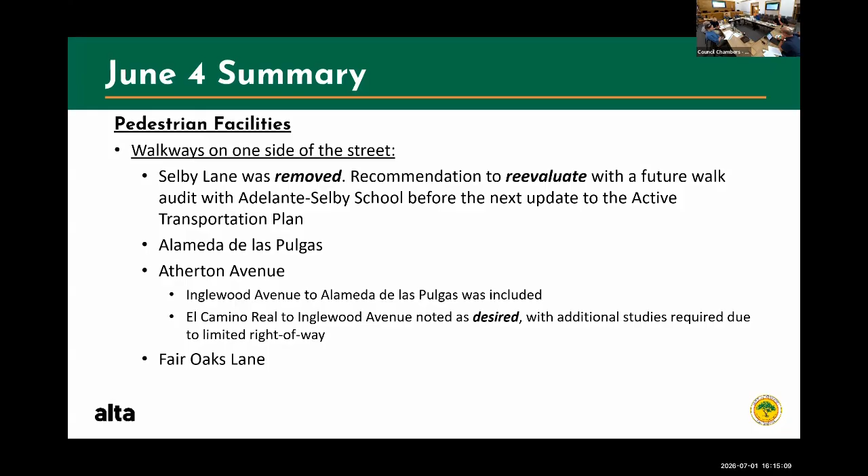Walkways are also to be implemented on Middlefield, which you are funding - today is the first day of the fiscal year, the current fiscal year budget. We have studies ongoing for Station Lane and Watkins Avenue. What was added was a walkway on one side on Oak Grove between Edge Road and Middlefield as a recommendation. The others are around the schools on the west side of town, around Alejandra, Park, Emilie and Elena. Selby Lane's recommendation was removed at the last meeting.

On the school side, we should also make the recommendation. Park Lane, Emilie, and Elena are only adjacent to Sacred Heart, and there are portions of those streets without sidewalks that go beyond Sacred Heart. On the map, it was really that loop around Sacred Heart on Emilie, Elena, and Park. I think we should state that it's around Sacred Heart so readers don't get confused.

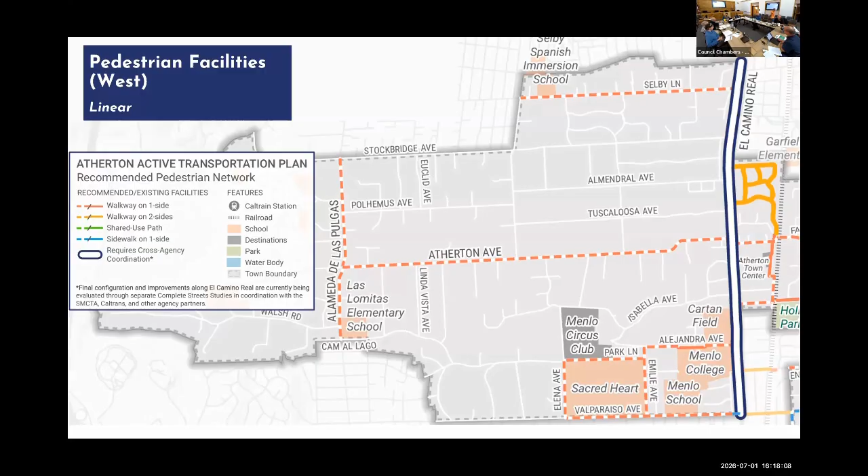On Encinal, I brought this up last week. The street is split between Menlo Park and the other side. We have bike lanes on our side, and there are bike lanes on both sides. My recollection is that the right of way all the way up to Laurel is ours, and the fronting properties for Felton Gables are Menlo Park properties—no wait, the roadway I believe is ours.

From Laurel up to Middlefield on the south side is Atherton's. But from El Camino all the way up to Laurel is Menlo Park, and El Camino all the way up to the school is Menlo Park on the north side, on the Felton Gable side.

Are you saying the roadway is ours even though the residents are not in our jurisdiction? Why is that? It's just the way the lines are drawn. There are several areas like that—portions of Stockbridge where the residents are in unincorporated county, but the roadway is ours.

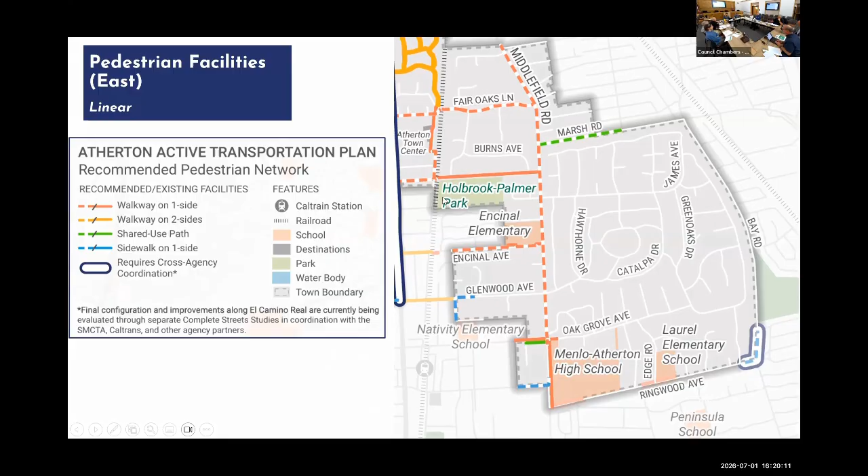I get all the mail from Encinal too, on Encinal. Well, that's the post office—yeah, it happens.

Again, with pedestrian facilities, we have that shared use pathway on Marsh. Sidewalks—this is different than the walkway—on one side fronting the multifamily zoning areas, and per the comments last time, it would be contingent on the development of those multifamily properties.

And then on El Camino, we have the recommendations for the multifamily zoning areas—what am I forgetting? There's that one lot, kind of at 23 Oakwood, that's on the border with Redwood City.

Do they have sidewalks? Redwood City does, but not us. I'm just thinking, are we going to put a sidewalk on one lot? Does it connect to anything? I don't know if we want to make an exception, but it's next to Redwood City, and they do have sidewalks, so it would connect—it wouldn't just be a random floating sidewalk.

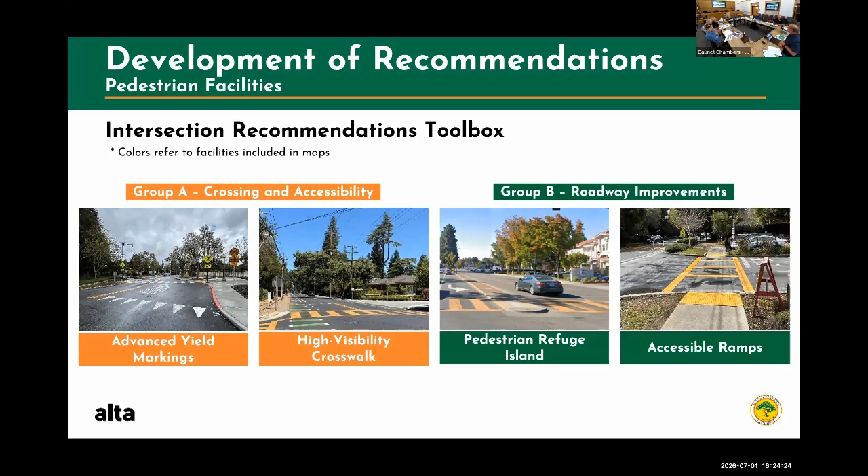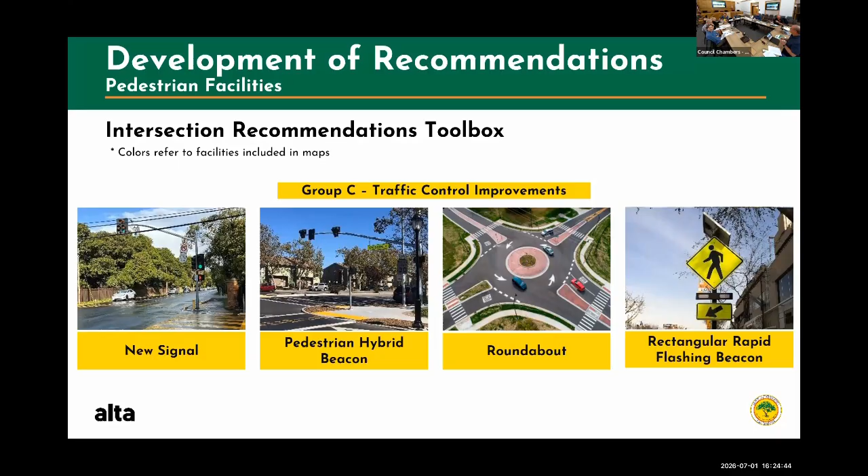Others, which are a bit more expensive, impactful, are new traffic signals, hybrid beacons, roundabout, rapid flashing beacons, which you all are familiar with. And so those are just tools in the toolbox for doing improvements.

And so as we go through the different intersections, I do want to highlight that though we are, for example, listing the desire for improvements along El Camino Real, the actual what those are going to be is really going to be determined by those studies that are being done. And there is a desire for pedestrian facilities, bike facilities on the roadway. And so similarly, having crossing improvements that correspond and correlate with that to make those crossings safer is something that needs to be incorporated in the study and the future improvements.

Similarly, on Middlefield Road, you've appropriated funds for pedestrian improvements. So as we go down that, we're going to be looking at each of those intersections to make sure that the crossing improvements are appropriate.

Several of the recommendations are either already in place, or being highlighted otherwise. So, for example, we already have high visibility crosswalks on Middlefield Road, which we implemented - it's there, should have it. We already have them. We have ramps already on Middlefield. There's just not a continuous walkway, which again is being funded.

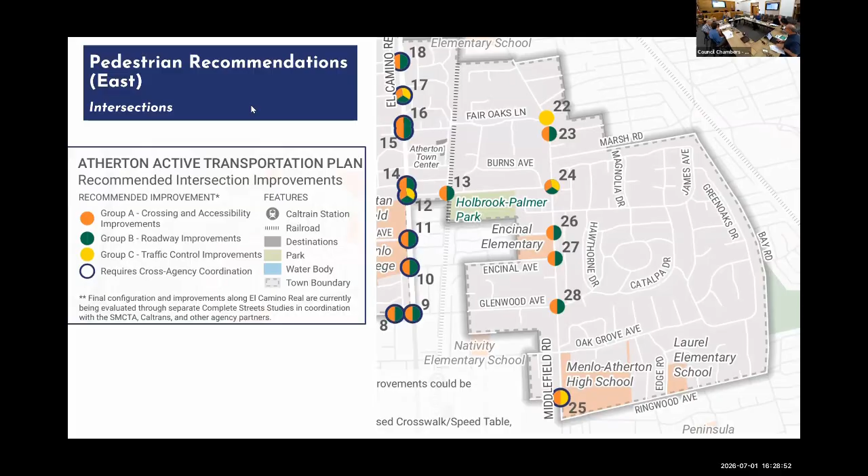Okay, give me a second and I can pull up. Just pull with it so we're all not missing any. If El Camino's redone, all that has to be sorted out to make sure it gets done again. So if they redo El Camino, then having a list.

I don't know if there's a pedestrian refuge island on that intersection on El Camino. Yeah, there is, and there's a place where you can stand at Encinal. It's not an island though, it's more of just a spot in the center median.

And these need to be protected in the crosswalk. There's a curb on the front so that the car hits you in the middle rather than on your legs, and does more damage to the car. That's only fair.

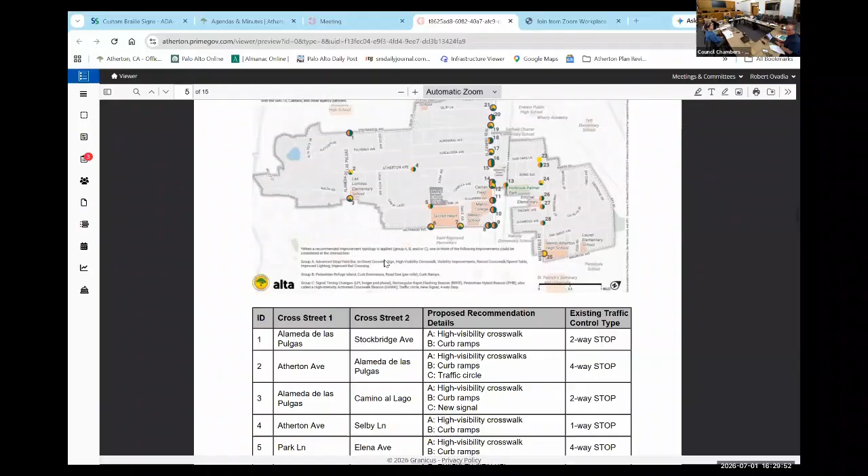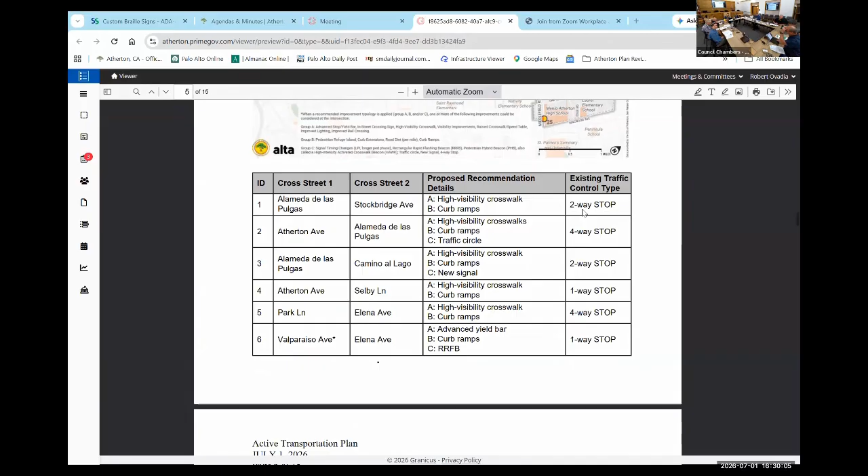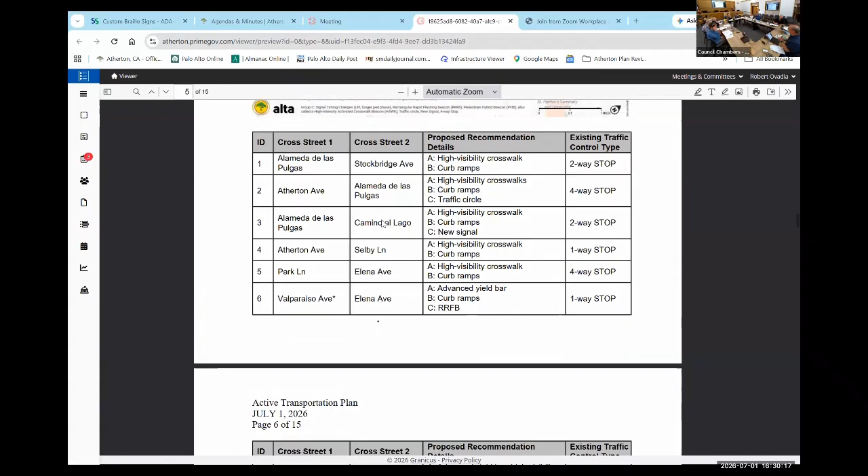Those have all been funded, those are all happening. Just making sure I didn't hallucinate. Atherton at Selby, this is currently a one-way stop.

This is currently a one-way stop on the Selby side. As we develop the plan for the walkway on Atherton, that would include at least a crossing on the Selby side. Having an uncontrolled crosswalk across Atherton is a little bit of a concern, so we wouldn't stripe a crosswalk without some sort of traffic control on Atherton, which is not contemplated at this time.

At Selby and Atherton, you only stop on Selby right now. So you're saying we wouldn't put in a crosswalk without putting in some sort of control device, a stop sign? No, rapid flashing beacon or something else. Keep in mind, there's no place right now to go from one side to the other, so we're not going to do any.

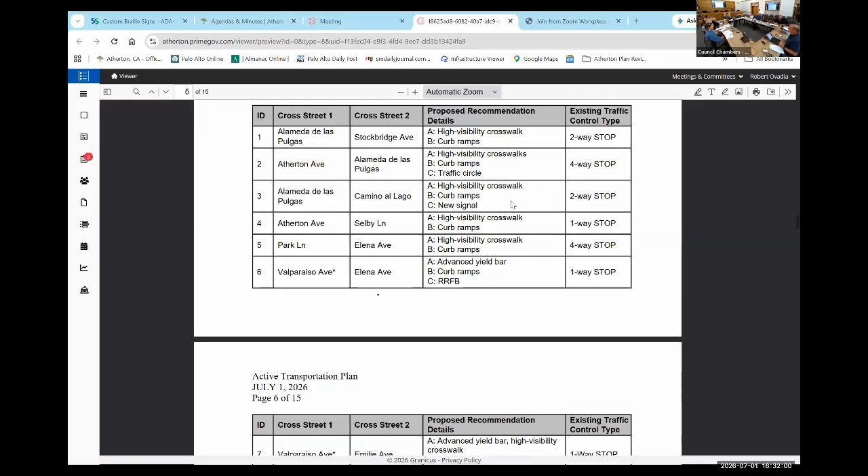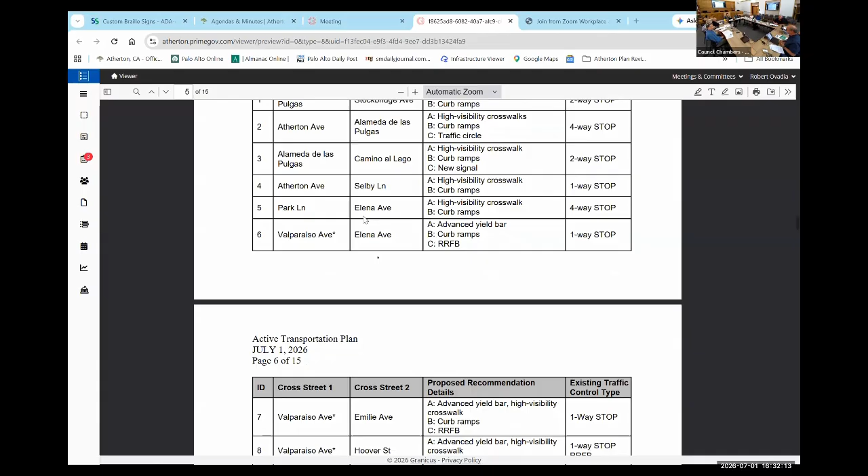As we do that walkway, there'd at least be the crossing across Selby. Park Lane and Elena, I think is just two lines, and so that'll be changed to a high visibility crosswalk, because it's right there around the schools.

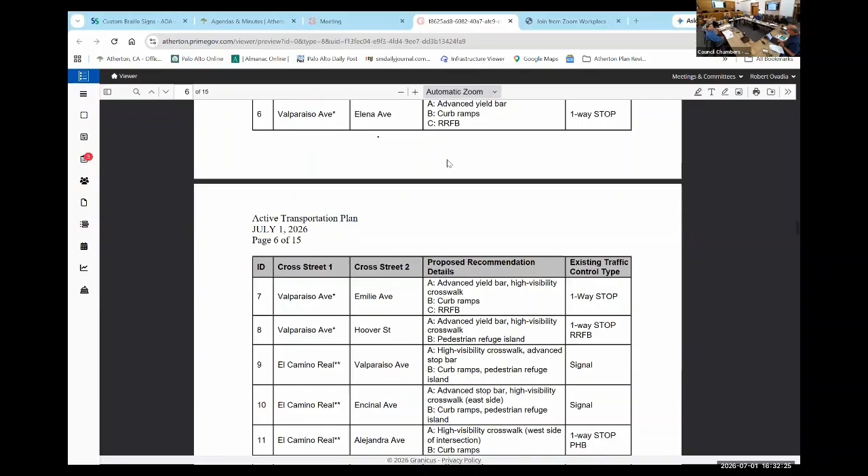Valparaiso and Elena is currently a one-way stop control. And I'm going to highlight these ones at and around the schools. There are certainly ways to improve those with rapid flashing beacons. They are shared intersections, and they are also related to private schools, so if desired, the schools can help with partner funding.

We would coordinate with Menlo Park for those as well. They've already put in some of these. Sacred Heart already has some in. Elena has a crosswalk, but it doesn't have any rapid flashing beacon.

No, it doesn't, not on Elena. There's one further down. Right as you go in, where the cars drive in, there's a rapid flashing beacon, and it's on the east side of the entrance to the school, where they also have a crossing guard.

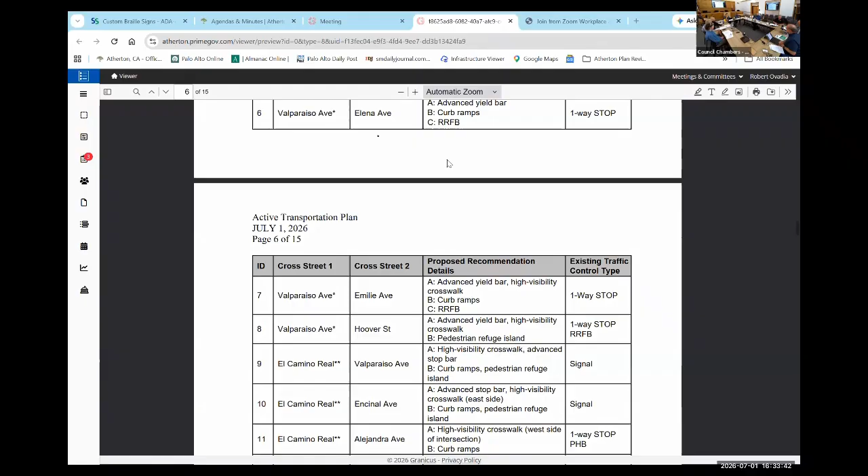And there is a pedestrian crosswalk painted there too. That's on Valparaiso, not at Elena. It's in the middle of Valparaiso at the entrance. Right, at the entrance, that's what I said, where the cars go. I know that's what you said.

And then again, we talked about El Camino Real. We talked about Watkins at Station Lane, that's funded currently and being reviewed.

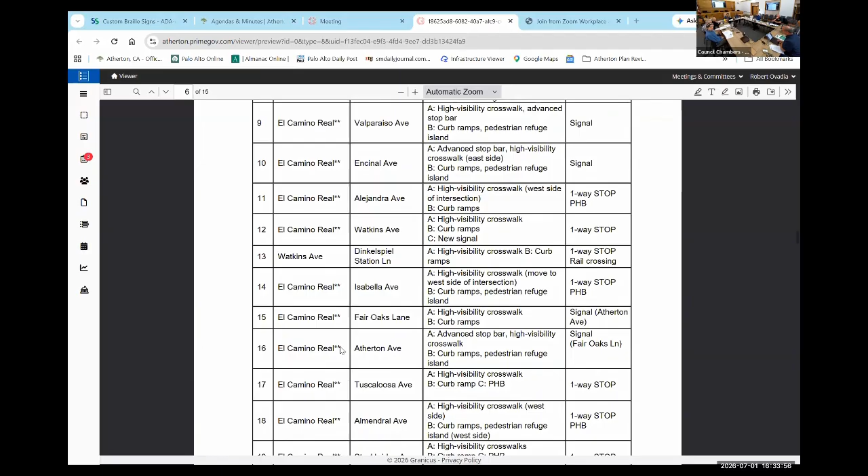And then Fair Oaks at Middlefield, we talked about. Middlefield at Holbrook, again, this is going to be linear along Middlefield as we do the improvements for the walkway.

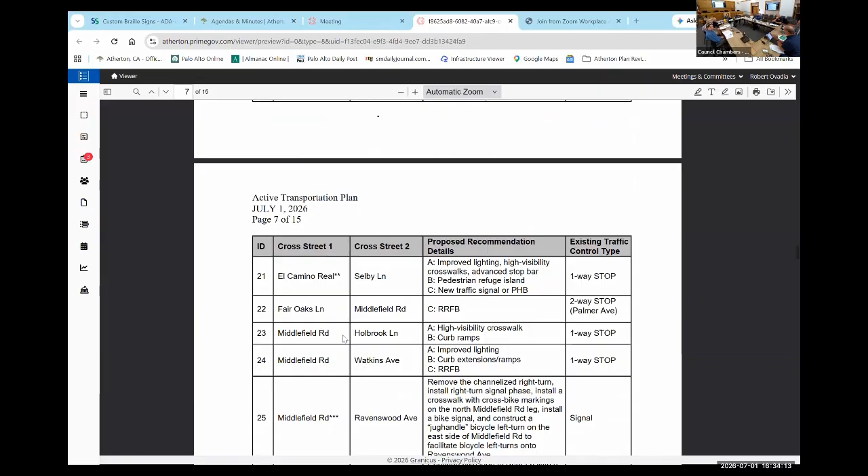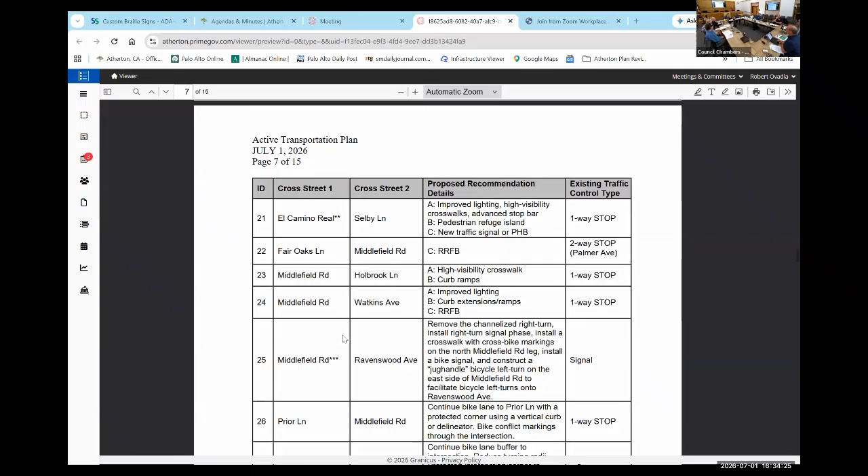I don't know why we're going through this if we're gonna come back and talk about every single one of these intersections. Were there ones that we skipped that you didn't talk about already? Is there something specific you wanted to talk about? Let's go through this.

You said that the proposal for Selby and Atherton Avenue isn't sufficient, that it requires some other device. The proposal is for a high visibility crosswalk, right? Yes. And you said that's not sufficient, it requires...

For crossing, we have a stop sign on Selby. So with the linear improvement of the walkway on Atherton Avenue, you'd have that high visibility crossing and ramps going across Selby, because there's a stop sign there. There's no control on Atherton Avenue, so there'd be no crosswalk across Atherton Avenue, unless you decide you want to do something else there as well, consistent with that.

It's certainly doable with a rapid flashing beacon, but the comment is you don't just stripe the crosswalk across Atherton Avenue, because the cars aren't stopping.

I may be old and confused at this point, but I always thought that there was, from Caltrans, the warrants to do a stop light at Selby and Atherton Avenue. At Selby and El Camino? Yeah, I thought... Oh, El Camino, that's different. Oh, we're okay, talking about Atherton Avenue. The question is about Selby at Atherton, which is a T intersection.

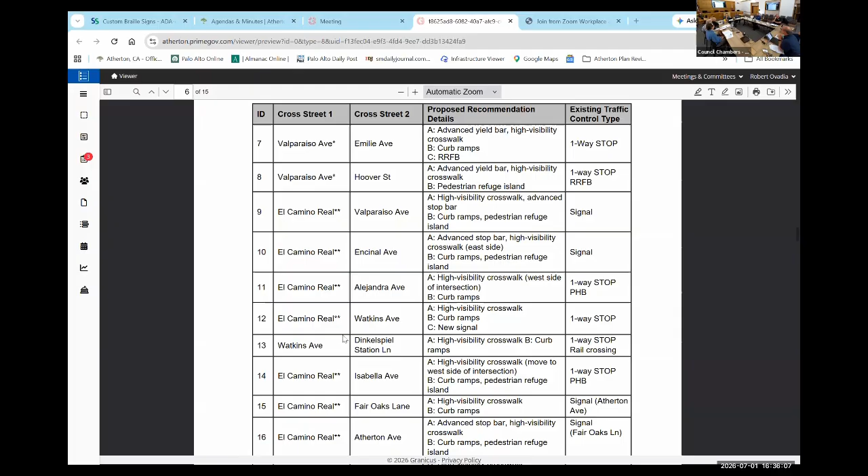Okay, good, because that's what I think needs to be done right away. Well, I think we should at least have a discussion about whether there should be a crosswalk across Atherton Avenue. Personally, I think that...

It's not decided where the walkway would be, but if the walkway were on the east side, on the side that is, I guess, the south side - people get confused about what direction is what - but on the Menlo Park facing side, if the walkway's on that side, we probably don't need anything coming across Atherton Avenue. If the walkway is on the other side, we obviously need the crosswalk across Selby, and maybe we don't need a crosswalk across Atherton Avenue, but I think we should discuss it.

There has been a fair amount of advocacy from people living along Atherton Avenue for a stop sign at that intersection. And I know that the cars that back up on Selby Lane to turn left onto Atherton Avenue can be quite long.

They can be, I've seen it, because people are afraid to go into the traffic - nobody slows down for you right there, they basically just blaze by you. There can be 7 or 8 cars waiting. I don't have a strong opinion about it, I'm just saying let's at least address it because it is an issue that's come up.

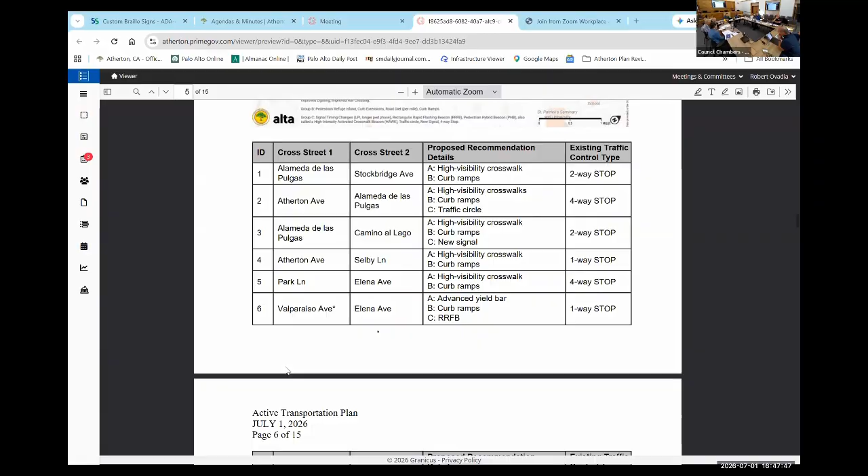Sorry, location again? On Elena between Park and... along the Circus Club and Atherton Avenue. It's really the cut-through from Valparaiso to Atherton Avenue.

And I think we did do a study once, and we didn't find anybody - it's all about timing, got to be there at the right time. So we already have a stop sign, so we just want to upgrade those crosswalks.

I think we're all good with that. So the next one is Valparaiso and Elena, which has a one-way stop, and we are recommending rapid flashing beacons. If there's a crossing to be made on Valparaiso, it would be with a high visibility crosswalk and rapid flashing beacons.

And that's a shared cost? Yeah, we'd split that cost with Menlo. We could have a conversation with Sacred Heart too because it's their students - there are opportunities to do that.

The question is sharing that - do the kids walk down that street to get to the Sacred Heart side? They should pay part of it. They ride their bikes, yeah - it's a busy intersection.

Is that where the performing arts building is? No, that's on the other side. What's there? I thought they just built something. You know, I don't think they have a lot of entrances to the campus on Atherton.

They have an entrance off of Elena, into a parking lot, but it's always shut and locked off, though they have control over it. I would think that from there, they could just walk down to the entrance and go in, because that's the main entrance to the school.

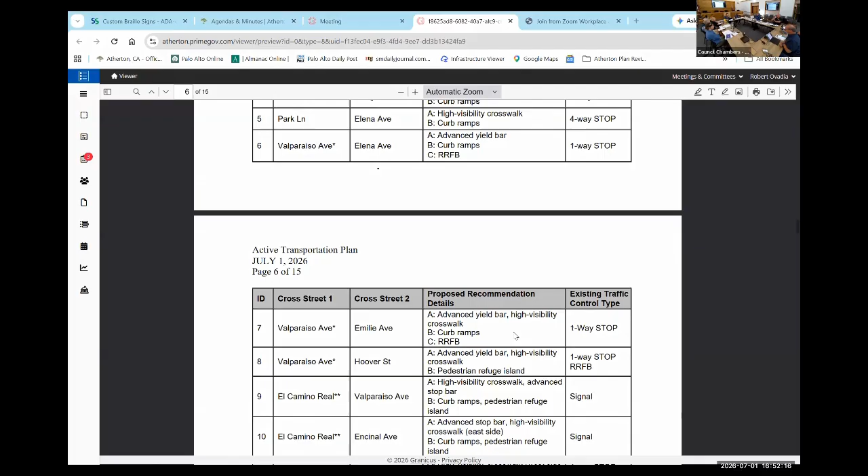Okay, Hoover and Valparaiso - who's who? They already have the rapid flashing beacon and a stop sign. There's also a striped median there, and the recommendation is to see if we can fit in some sort of pedestrian refuge with some advanced yield markings.

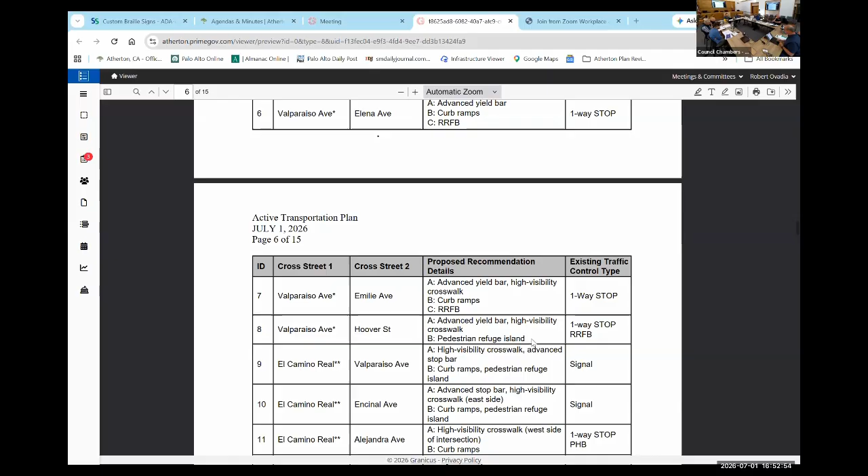Why do we need that? I don't think we need it. These guys put stop signs and rapid flashing beacons at every intersection on every major road - that's what they've done. I think we need to use some consultant judgment to decide where we really do need these things, because all we're doing is just... that's our job, that's what we're doing.

Can I ask a question, because these are all close to each other - would it make sense to lump them as one study? Right now we just did Fair Oaks and Watkins as one traffic signal study for that area. These all work together and serve this area - would it make sense, to Bill's point, instead of us independently adding these, to have them as a single project?

I don't think Hoover... at this time, we're not prioritizing projects that way. I think Hoover and Emilie are totally different. Totally different, you're right, absolutely. The only relationship is they're both on Valparaiso.

No support. We can get rid of the pedestrian refuge. Yeah, I don't think we need it - that's the biggest change to that intersection. Restriping it with bright yellow in front of the school, that's probably a good thing to do.

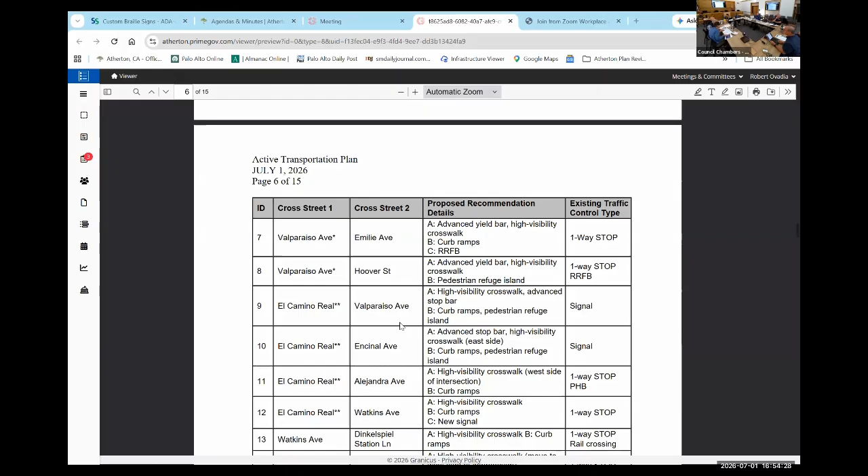But the pedestrian refuge is a policy matter. I think for your normal maintenance, when you're painting and redoing the bike lanes, if you want to make them high visibility, be my guest. I don't think we need to discuss those since you're just going to go do it. I look forward to that.

So I don't know how much detail you want to get into on El Camino. That all requires real evaluation, but we're happy to talk about it.

The only question I would have on El Camino is if we don't have exactly what we want and they come in and say, what do you want? What are you going to say?

So we'd say we have our 2 alternatives that the council kind of blessed to move forward with additional study. That additional study is now going to be carried by Samtrans. Along with those 2, they're adding in a 3rd alternative. Based on that, they're going to do the traffic modeling and analysis of the impacts. Caltrans will be involved in that.

We will be involved in it, as will Menlo Park and the county, because the stretch runs through there. As that study is done, there's going to be feedback that we'll be sharing with the council, and ultimately we're going to be looking forward to a preferred alternative.

I have two comments on the El Camino stuff in total. One of them I care a lot about, and one of them I don't care so much about.

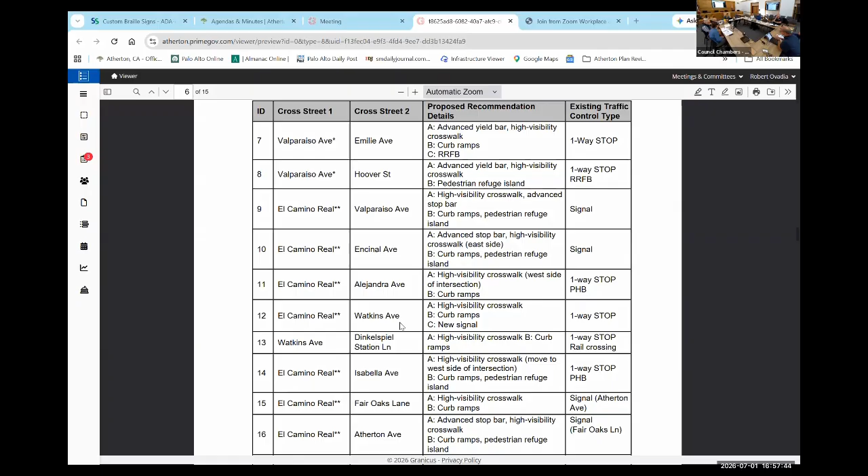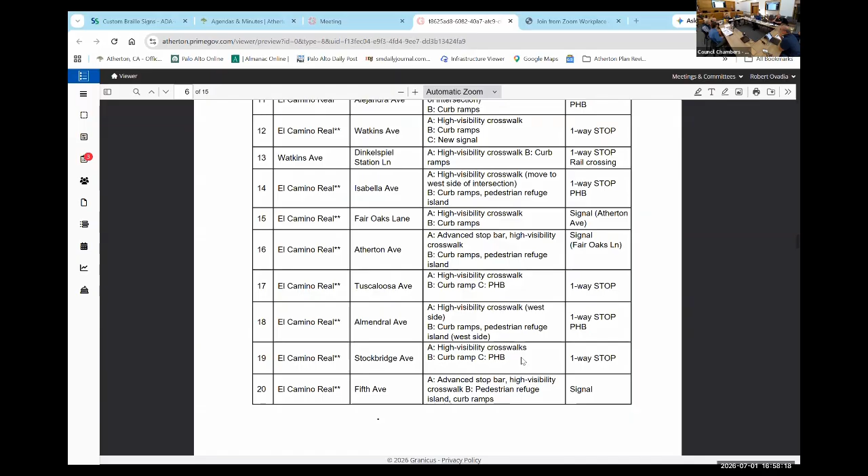So, I mean, what is the usage, I guess? I think the point though is that all this is tied to sidewalks being on El Camino, so maybe we table all these until that design is finalized.

Part of the design, right? I'll make a suggestion. What we did with the bike and pedestrian improvement is we basically highlighted the corridor, and we can certainly do the same thing with this rather than listing each individual intersection - highlight the corridor and indicate that each intersection needs to be reviewed and evaluated for improvement, consistent with those other studies that are happening, which is kind of the way we highlighted the linear thing, acknowledging there's a need.

Right, right. Well, let me just interrupt you. The reason we want to put a new signal at Watkins is because there is definitely a need, you know, because it has so much traffic.

The reason we did the HAWK beacon at Alejandra and Isabella, I think, is because of the need for crossing. The school, the college is there, and there's so much crossing over from Alejandra, and there's bus stops there. The Isabella one I always wondered about - there's a bus stop because it's the direct route to the park. And Almendral is because of the fire station. So I understand those three, but to put any more, I think it's a little much.

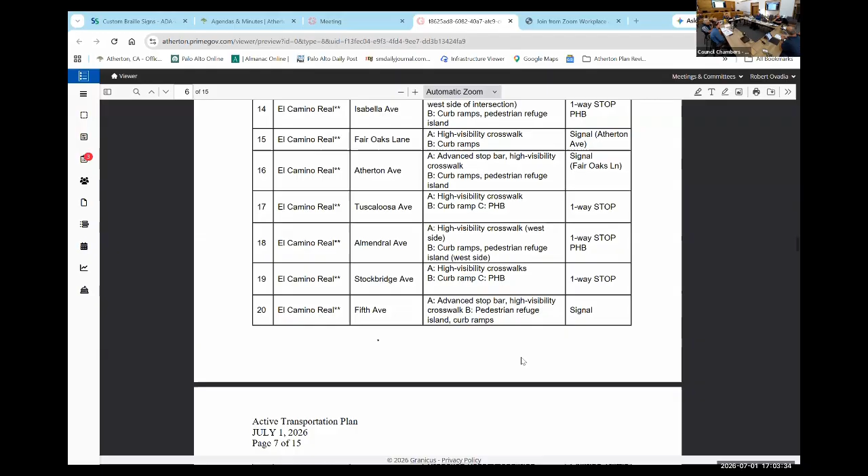So are there any intersections on El Camino besides Selby and Atherton Avenue that you want to pull independent of the sidewalk project and bike lane project for this plan? There is one to note - ECR and Watkins. That's part of the Caltrain mitigation measure. When Caltrain reaches a certain tier of ridership, it will be signalized and they'll pay for it. But because the usage is very high on Watkins, I see a lot of people turning left - it's horrible. They even put a sign that says dangerous.

You cannot turn left after hard 5 o'clock, 4 o'clock, 6 o'clock. Yeah, and people still do. Of course they do, they don't read signs. I'm wondering if that one merits, can we pull that out and keep that as a signal? Yeah, I think that's important.

But I don't want El Camino, our stretch of 1.6 miles, to look like Redwood City where every block there's a stoplight. That's right, that's what I was bringing up, so don't do that please. And that's exactly what this study does, both at Middlefield as well as El Camino. Well, the study didn't say stoplights everywhere, but they did propose the hawk beacons, the PHBs. Those can be annoying also. Well, like I said, they've done it at every intersection on Middlefield as well.

Now we're moving on. I want to point out that I do like, on Fifth Avenue, the idea of the refuge island for pedestrians, which would be orthogonal to anything that happens on El Camino. I just agree with that one. Well, that'll be paid for by the county.

North Fair Oaks, that's the county, not us, we don't have to pay for it. But that intersection gets a lot of use, there's a bus stop right there, so that gets a lot of pedestrian usage. But that should be in there. Not necessarily in ours. Okay, well we can move on.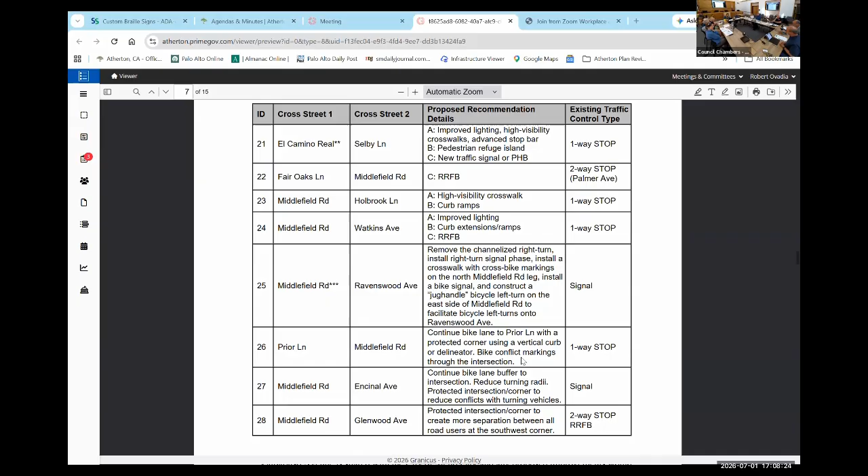So do we own that pork chop? No, that corner is Menlo Park. Okay, but I'm gonna say that whole intersection needs to be redone. So we own the school side, and I believe we also own the side fronting Ravenswood across from SRI. Yeah, that's ours, that's the multifamily property, that's Edgerton. So it's an acknowledgement that it's a shared intersection that needs to be improved, getting rid of that channelized right turn and looking at how we can facilitate bike access in and around the intersection as well.

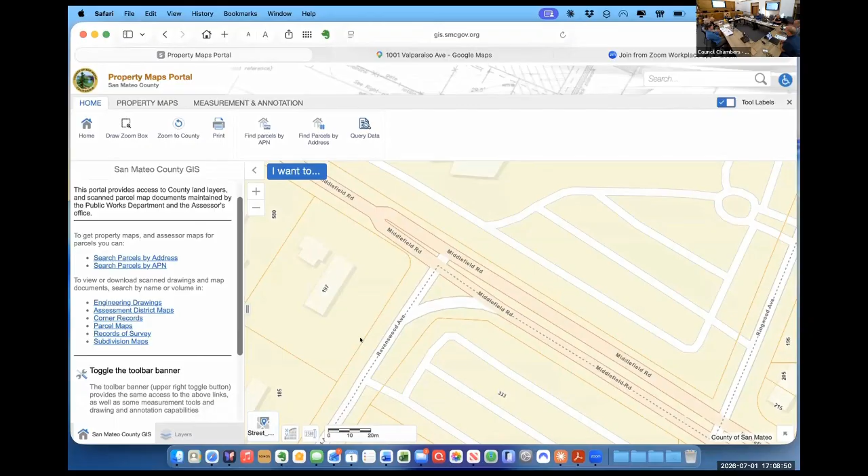Won't all that be massively changed when SRI does their thing? So why are we even spending any brain power on this now? Because everything has... this is an opportunity for us to say that this intersection needs to be improved. We're not saying we're gonna do just that, just that it needs to be improved. But SRI is gonna change that.

As is the geologic survey. Is this the Menlo Park tower plan? Is this the same? It has been deferred based on SRI. It's massive, and that intersection looks like this on the big screen. Have you heard of the office development? I have the Google Street View.

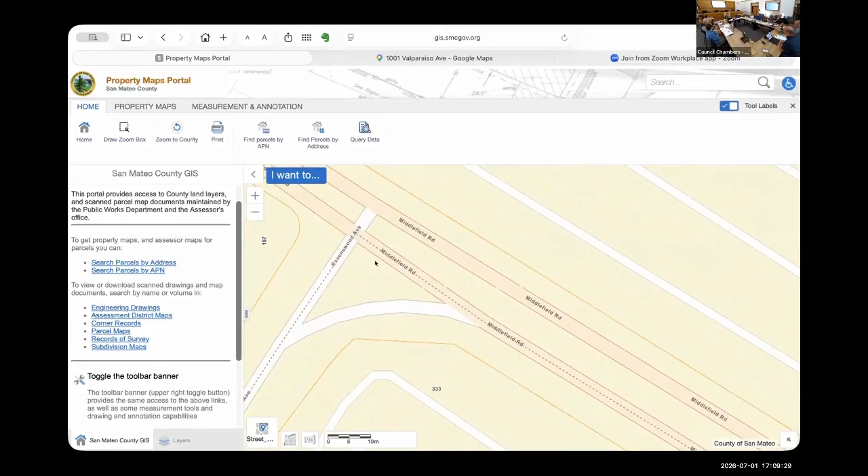There's too many people talking right now. We need some kind of leadership. Well, I'm doing my best here, you guys. Everyone's side chatting, so put on your boss hat. Okay, we're almost through this part and then we get to the hard part.

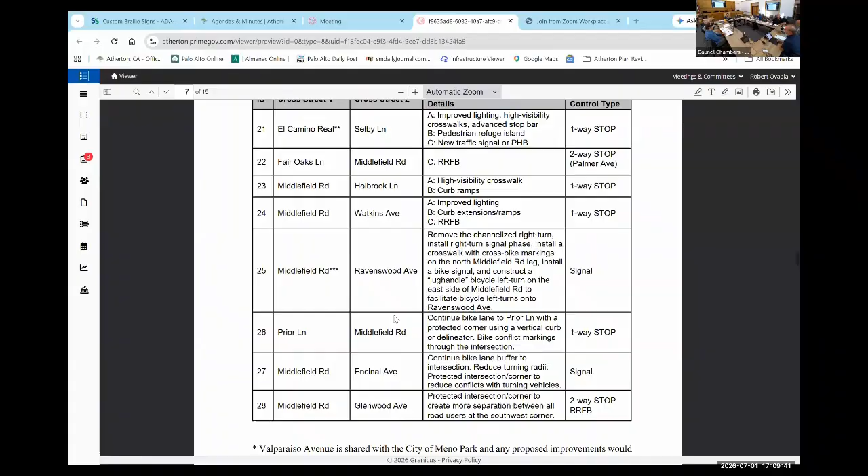Do you want it on that intersection? Yeah, okay, on this intersection. So I like the idea of stating that this needs to be improved and recognizing that it's going to have a good deal of impact when the SRI project gets done. What I don't like is, because I don't know what it means, I don't really like making a recommendation that we should install a bike signal and construct a jug handle bicycle left turn on the east side of blah, blah, blah. I don't know what any of that means.

And if we're gonna recommend it, we have to know what it means. So I'm very comfortable saying the intersection needs to be improved, and then we'll review it when the SRI stuff comes out. But the SRI project is not in Atherton, and we do not control what they actually do or have to mitigate. We can provide comment to their development, but it's not in the town. So if we have a plan that says this is what we want to see at that intersection, that kind of gives us a little more preempting power.

We've told them what our plans were before, and in Menlo Park they're sticking their horses in anyway. It would inform SRI's planning to see what the two towns have wanted at that intersection. My question was more, does our plan align with Menlo Park's plan? Because if it's the same plan, then SRI, I assume, is gonna follow both of our plans. Well, we don't know Menlo Park's plan. That, when you guys were side chatting, that was my question for Robert and George. Did he answer? Yeah, he was.

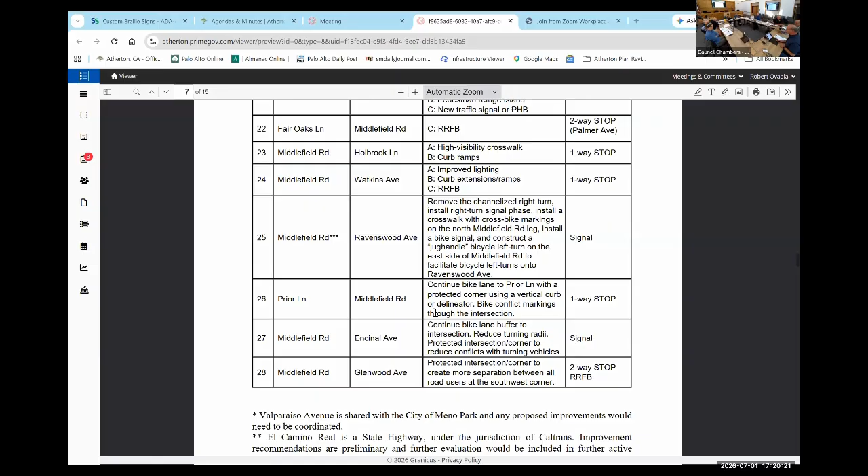So Charlie, let me try and interpret that a little differently. Right now, cars merge over to the right into the bike lane like they're supposed to turn. Right, correct, they're supposed to. Okay, so what you're suggesting is not allowing them to do that. Correct, and you could do that with a curb or some other obstruction, like a delineator.

Yeah, or some other obstruction, but there's gotta be some separation that protects the bike lane, right? Yes. But it's gonna be a lot cheaper to do delineators than a curb. No, that's certainly the case. The only consideration I'd have is that there's only one lane on Middlefield.

That right-turning car isn't really the issue, it's trucks, a garbage truck. This location was where a garbage truck turned right and killed the bicyclist, who at that time was on an electric bike going at higher speed and maybe didn't notice the truck starting to turn.

I think this slows down and widens the turn, so the truck would have more of an opportunity to see anyone coming or crossing at that intersection, whether pedestrian or bicyclist. That's what the separation does, it buys a couple extra seconds.

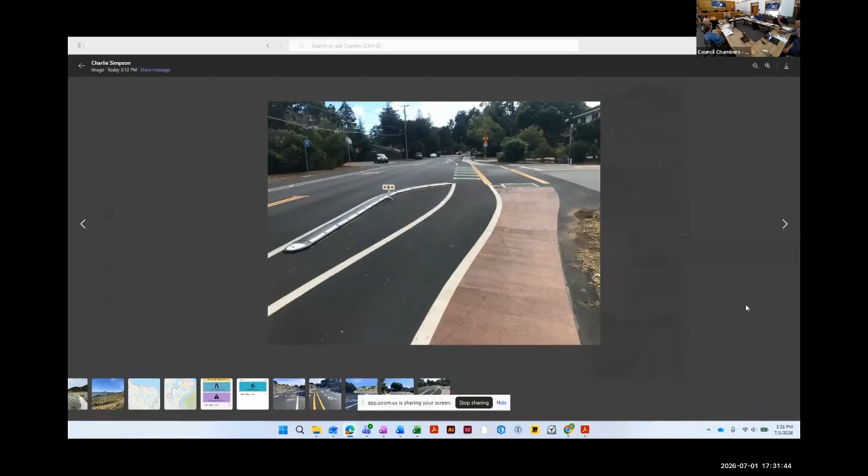So as ignorant as our car drivers and bicyclists are, I don't think we need this. I vote not in favor of that, but I am in favor of making the green hash marks earlier. Like coming up to Glenwood on Middlefield, I think you've got 2, maybe 3 green boxes, but not enough - you should have it further back. And those are big boxes; as you get closer to the intersection, for the turning thing, you need to have them smaller.

I feel like we are getting into the design component, but we should just be identifying intersections that are a priority. To me, this is the backside of an elementary school that people ride their bikes to, so why wouldn't we be making sure that intersection is safe? Whatever that design ends up being, it feels like it should be on the list.

So the secondary part of that recommendation is to just carry those green boxes across the intersection, which we can have as a blanket for the entire - yeah, that's what they do in Palo Alto.

I would also, because we are focusing on schools, like Oak Grove - the way people get to schools - I'm wondering if other intersections should get the same bike treatment we're doing for these intersections on Middlefield, that serve people using to get to Laurel from Lindenwood or wherever, for when we add the delineators.

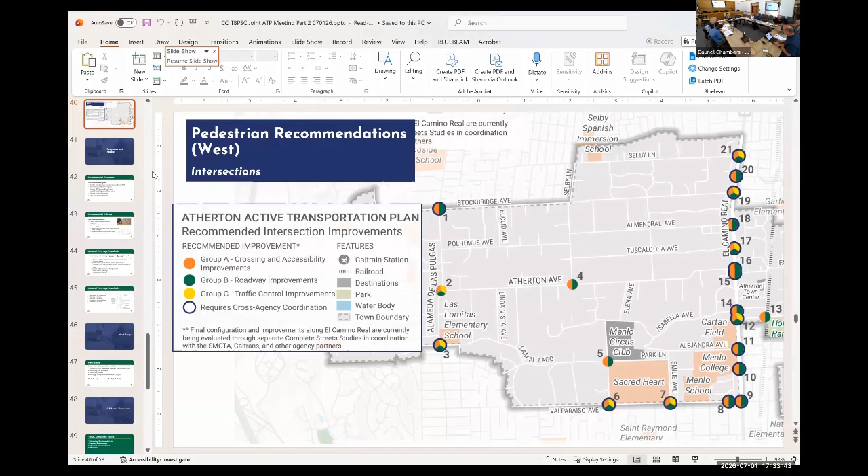Okay, now we have to talk about, I think what we decided with Prior Lane and Encinal, it's the same, that would be all the same recommendation. So then Glenwood. Bill, do you have opinions on Glenwood? No, he only owns it, so he has none. So are we going with what is here on Encinal?

And I'm telling you, that stuff that they're talking about is dangerous. It's dangerous to the bikers. So you're saying protect an intersection corner to create more separation between road users at the southwest corner is what is recommended on Glenwood and Middlefield.

I don't know what that means. What you're saying is you're gonna put the green hash marks, that's it. For all three of those, 26, 27, it's the same on all three. Is that right, what's recommended? No, that's what we're recommending, and you made a note of it. I'm really struggling with us diverging from what traffic experts are recommending for safety stuff on this.

Can you explain what is separation between all road users at the southwest corner? This is just worded slightly differently, but it's the same exact concept, I think. Shared, yeah, okay, it's just putting more physical barriers between each individual user, road, bike. That's the problem. Just different phrasing, same solution.

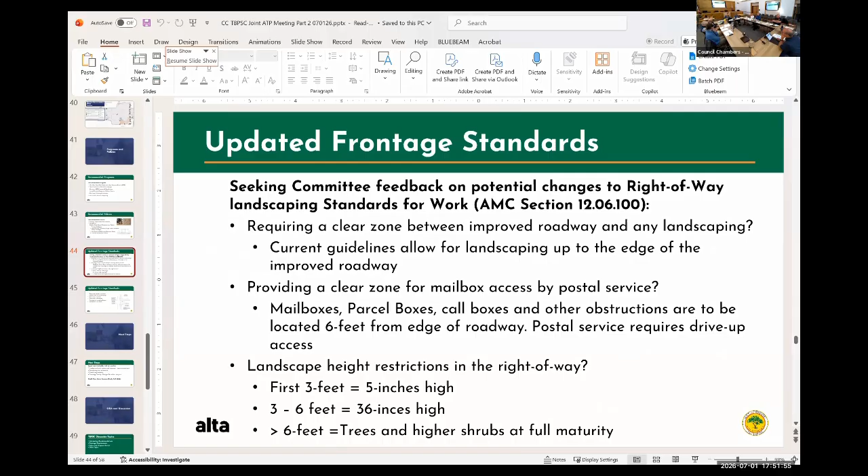Yes. So that didn't answer my other question though. For a house that's not on a pedestrian pathway location, would this new frontage standard apply to them? So would that mean, if we had a new frontage standard for the whole town and we changed it tomorrow, most of the town would have illegal frontages? How does that work?

Then, just like it kind of works today, because we changed these standards probably right before I got here. We had Bill Widmer and Councilmember Lempres at the time doing neighborhood walkarounds, trying to educate people about rocks, stones, things like that in the right of way. And when the town changed the ordinance, there were a lot of homes in town that were grandfathered that had these things out in their frontage. We gave them an amortization period, 20 years, to move it back.

Okay, some of the longer-term council, we'll call it a two-step process. When somebody comes in and wants to do something, we would make them meet that new standard. And as George was saying, some sort of grandfather period or transition period for those that are existing. I'll use the example of Lindenwood, where everybody has not just low vegetation, but big shrubs that go right up to the edge of the road. We're not going to knock on their door and say, hey, we just enacted this ordinance, remove it tomorrow. It's going to be, hey, the town is enacting this ordinance, and over the next 5, 7, 10, whatever number the council chooses, you will be expected to remove that vegetation.

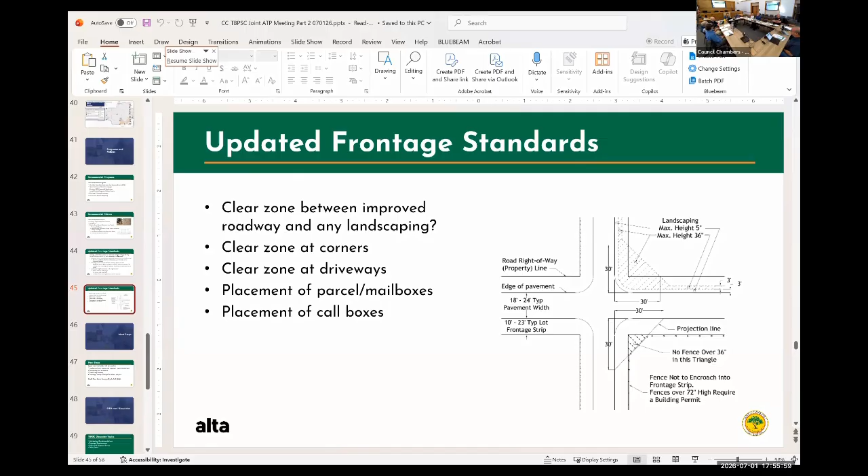I think there are several issues in programs and policies that require discussion before we start going down any path of having staff develop. And those include the issue of this daylight area that could be 4 feet or could be 6 feet. That's a big decision. It would change the character of the town.

So daylighting is different - we use daylighting as an example. Can we finish? Okay, I also think the issue of what we're going to do where we have a walkway, like on Atherton Avenue between Inglewood and Alameda, how properties adjust to that or deal with that is a discussion we have to have. We haven't had it, it just got raised. And we ran into that with 170 Atherton Avenue, and we need to have that discussion.

The proposal also recommends considering adopting an ordinance to collect developer fees toward transportation improvements. We need to talk about that. So there are several things in the policies and programs that I think amount to more than an hour of discussion, and we should schedule that for another meeting.

So my comment, and he hit on a lot of what I was thinking about, is what is our objective in looking at this? What is our vision for improving Atherton, the Atherton look? I know there's landscaping going right up to the edge of some of these small streets, and it's a nuisance. But over time, that's what's happened. So what is our objective in doing this? What is our vision for Atherton and how we want to see the look and feel of our town as it is on the roads? And then all those other comments that we need to consider.